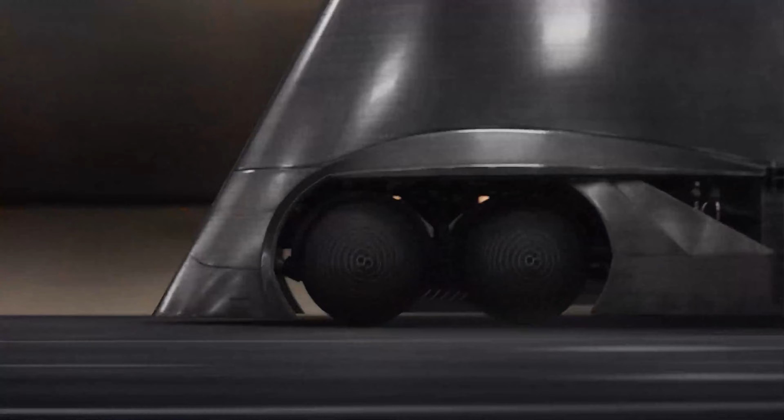Now switch from autonomous vehicle to manual override.

This comes from a video called I, Robot from 2004. I was a young child when I first was shocked by how a vehicle in this movie works.

We can see that there are two kinds of autonomous vehicles in the video. One has human passengers and another is absolutely unmanned.

In this research, we will discuss the first kind, with human passengers. We can see that it can drive itself, and in case of emergencies, the human driver can take over full control from the system. This imaginary vehicle is a glimpse of the future.

So, first is the background of autonomous vehicles. Why do we choose autonomous vehicles? This is a very good question.

According to the numbers, 1.2 million people die in traffic accidents every year in the world, and this number is still rising. About 94% of traffic accidents are caused by human factors.

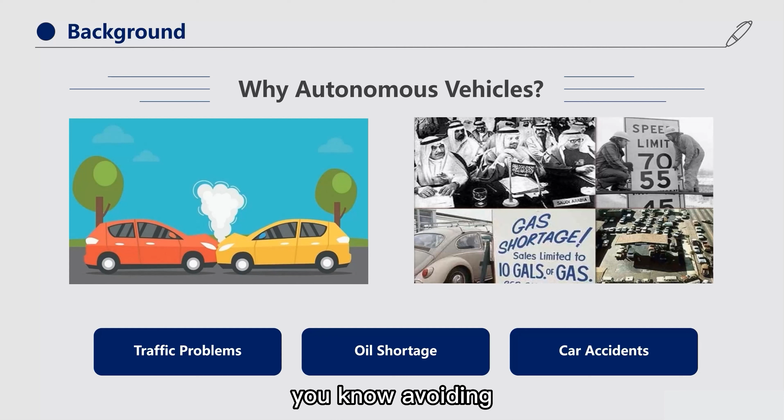It is estimated that if all the vehicles in the world are replaced with autonomous vehicles with intelligent perception and coordination capabilities, humankind can avoid at least 1 million deaths in traffic accidents every year, reduce auto carbon emissions by more than 10%, and save fossil fuel, avoiding a shortage of oil.

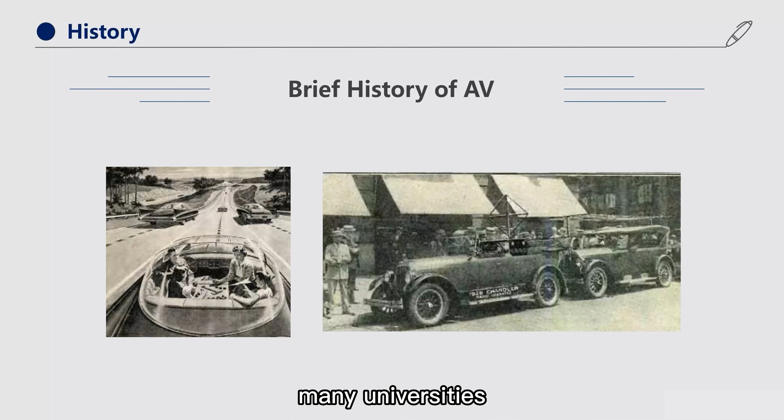Autonomous vehicle systems date back to the 1920s and 1930s, with the first truly autonomous vehicles appearing in the 1980s. Since the mid-1980s, many universities, research centers, and companies around the world have been researching and developing autonomous vehicles.

In 1984, Carnegie Mellon University promoted the NavLab program and the ALV program. After the 21st century, fully autonomous vehicles have been manufactured as test vehicles, and Tesla cars were the best and the first to launch.

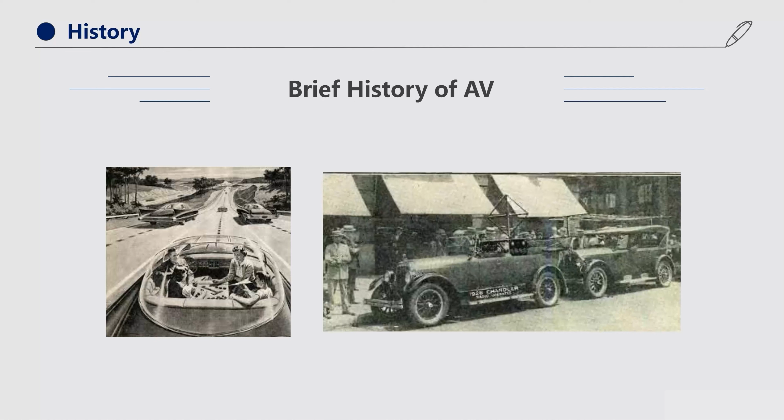Autonomous vehicles are used in specific environments. From now on, we will carry out need analysis on autonomous vehicles using system engineering knowledge.

From the perspective of engineering, using operations analysis, we can find a list of operational objectives and system capabilities, which includes several major needs of the current users for autonomous vehicles.

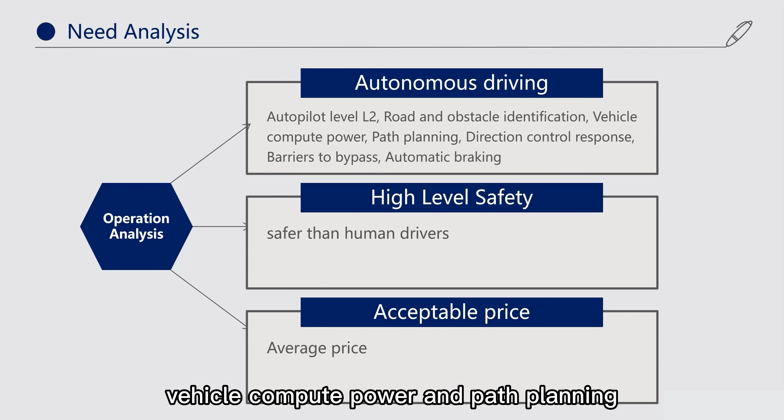The first is, of course, autonomous driving, and it includes several parts, but we unite them as one function, one subsystem, which includes autopilot level L2, road and obstacle identification, vehicle compute power, path planning, direction control response, barriers bypass, and automatic braking—that's emergency braking.

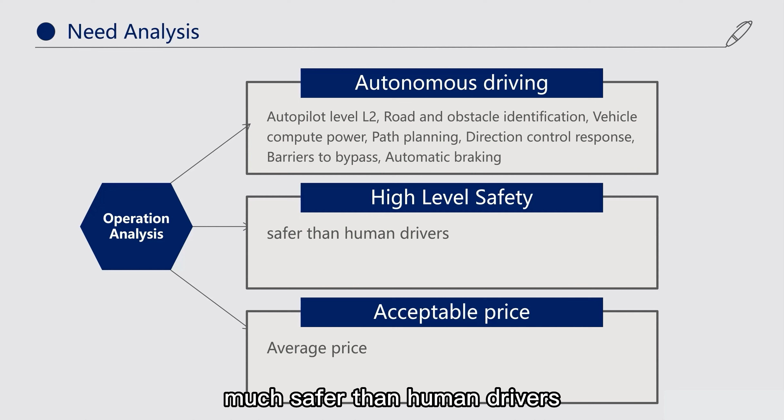The second one is a high level of safety, which means the autonomous vehicle must be much safer than human drivers. We as humans are not fit to focus the whole time, you know. The third one is acceptable price, which means it cannot be much more expensive than the average car price—it has to be affordable to most people.

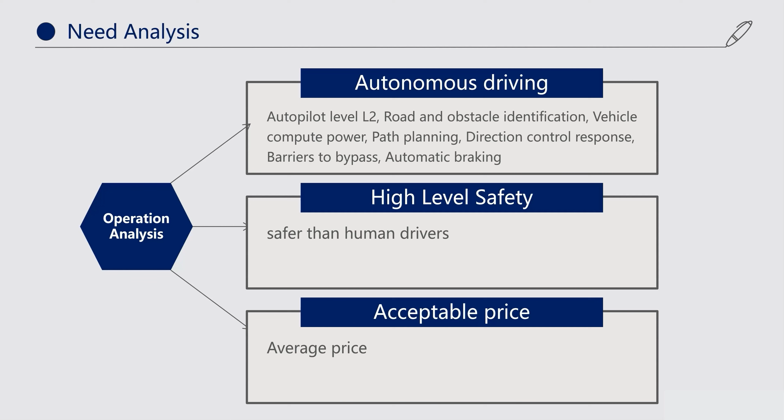Great. So in the functional analysis stage, we can find the following required functions.

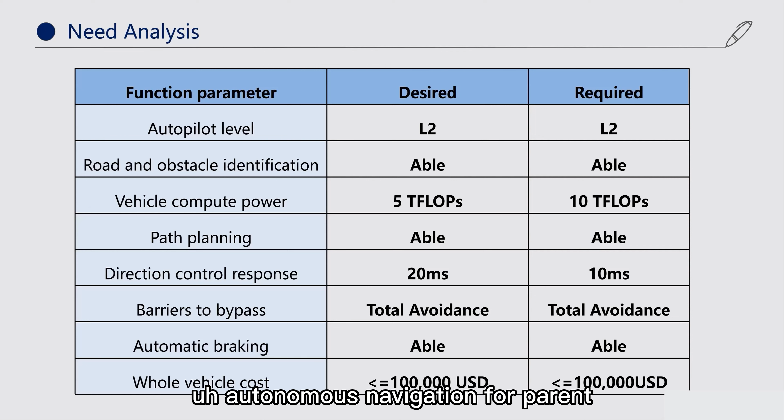Autonomous vehicles would be a vehicle that looks like a traditional car, but only looks like. The main function is to provide a certain degree, L2 or L3 level, of autonomous navigation for passengers or drivers, improve the identification of roads and obstacles, path planning, and direction control.

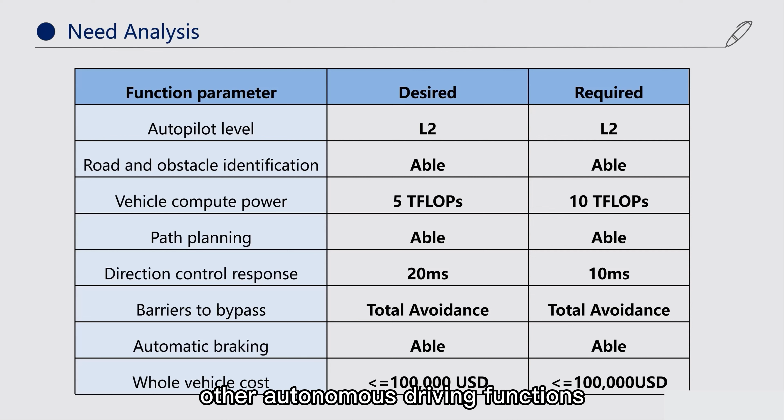It should include autonomic acceleration and deceleration in the range of 0 to 200 kilometers an hour, obstacle passing, emergency braking, and other autonomous driving functions. It must be able to provide passengers or drivers with driving services similar to human drivers.

Autonomous vehicles should be able to use onboard computers to determine in real-time factors that may pose risks to passengers, pedestrians, and others, and take reasonable measures to avoid obstacles in advance. Autonomous vehicles should have a similar price range to passenger cars, usually between $10,000 and $100,000.

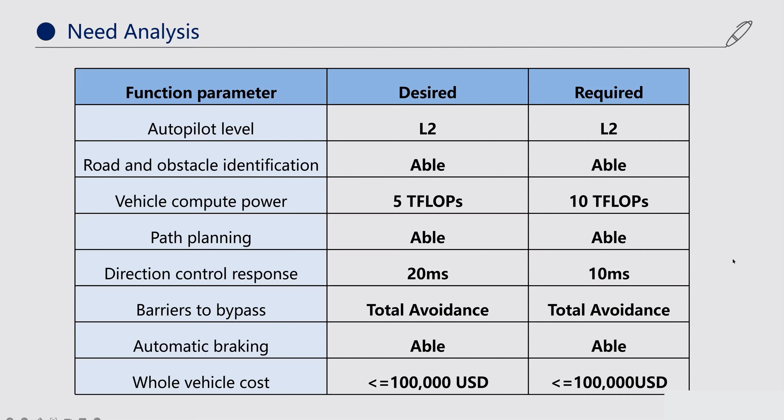According to the function needed, and as we analyzed, we know there are three kinds of needs that must be met: first is autonomous driving, second high-level safety, and third acceptable price, as we mentioned before.

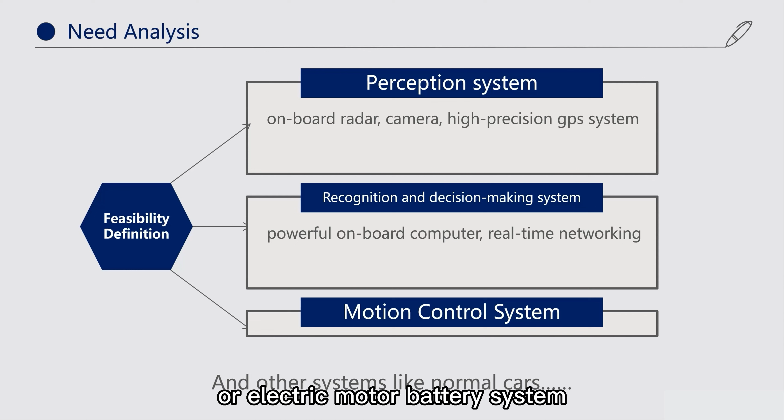Therefore, using the feasibility definition, we can conclude that the main components of an autonomous car include the engine or electric motor, battery system and electrical system, frame, suspension system, passenger compartment, interior, etc. Most of these are the same or similar to ordinary cars, so we won't discuss them in detail. What we are going to discuss is the subsystems that only the autonomous vehicle has, and those are vital to autonomous vehicles.

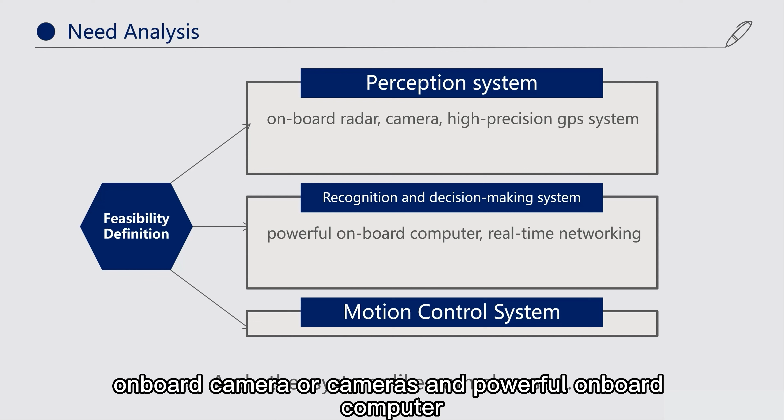These include onboard radar, onboard camera or cameras, a powerful onboard computer, high precision GPS system, real-time networking system, and direction, acceleration and deceleration control systems, etc.

These can be summarized into three major parts. The first is the environment perception system, or perception system. The second is the recognition and decision-making system - sometimes this is divided into two, but since those are all software on the onboard computer, algorithms, we combine them into one. The third is, of course, the motion control system, which does what the computer tells the car to do and transfers that into real actions.

And of course, there are other systems like normal cars, which we will not discuss in detail in this presentation.

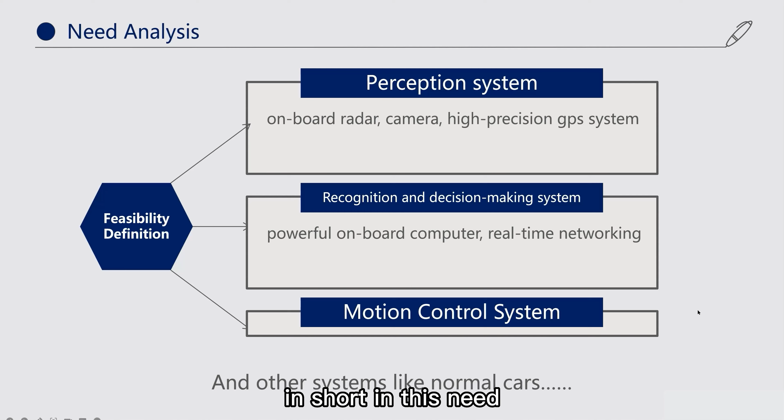In short, in this need validation stage, we analyzed and concluded that the needs are valid and can be met. We should be able to engineer an autonomous vehicle that meets our numbers.

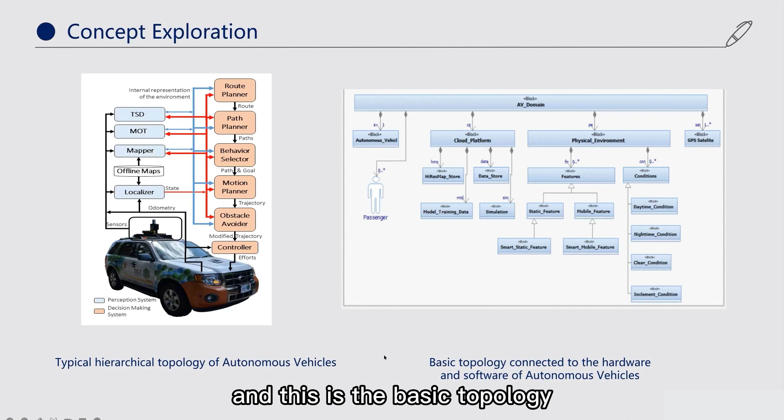This is a typical hierarchical topology of autonomous vehicles. This is the basic topology connecting the hardware and software of autonomous vehicles in the form of a diagram.

Now, in the concept exploration stage, considering the requirements and constraints and system materialization during the system lifecycle, we aim to find the suitable engineering alternatives for the system. Different subsystems of the autonomous driving system have multiple sets of available solutions, like every engineering practice.

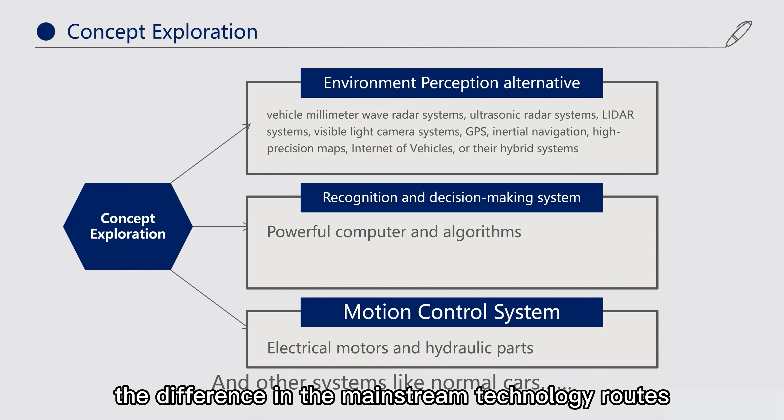The difference in mainstream technology routes mainly reflects the differences between the environment perception system and the vehicle intelligent identification, path planning, and vehicle control system algorithms, which includes three parts, as we mentioned before.

The first is alternatives for the environment perception system. These are vehicle millimeter wave radar systems and ultrasonic radar systems, LiDAR systems, visible light camera systems, and high precision GPS, inertial navigation, high precision maps, and of course, in order to communicate, we need the Internet of Vehicles or hybrid systems.

The second part is the recognition and decision-making system. Its alternatives are powerful computers, onboard computers, and algorithms. In short, for details you can check my written report.

The third part is the motion control system. Electrical motors and hydraulic parts are usually the alternatives we would adopt. Just to be clear, autonomous vehicles are still vehicles - they still have the main parts and traditional subsystems that normal vehicles have. These traditional subsystems will be included in the final report of the engineering exploration.

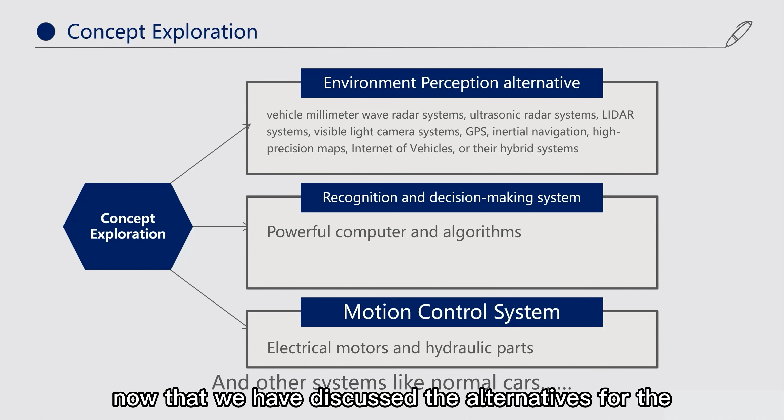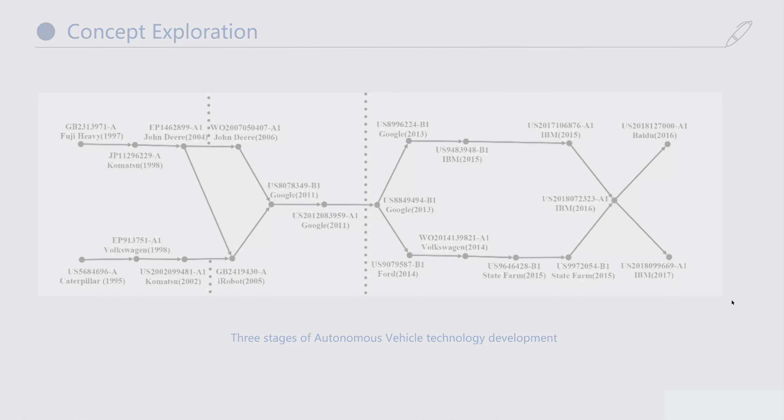Now we have got to the concept definition part. In this part, we will choose the finest alternative and give the definition of them. For detailed discussion, see the written report. Due to time restrictions, we won't go through the discussion in detail - I can see I have only 1 minute left. Oh well, maybe I need more.

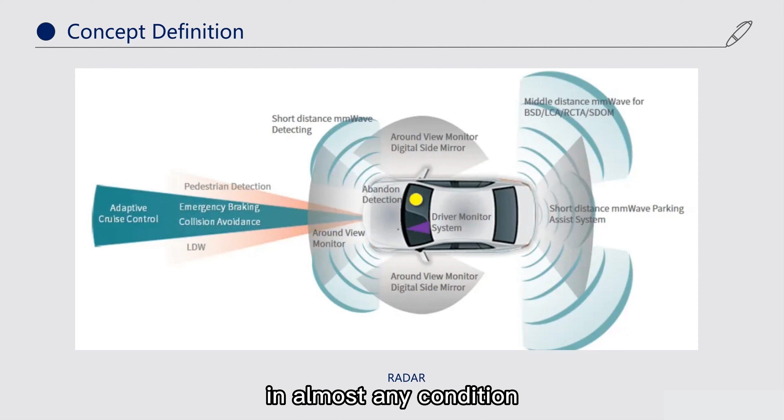We choose radar with cameras over LiDAR to be the environment perception solution, because radar is the most reliable technology for detecting the distance, range, and motion characteristics of objects in almost any condition. It uses reflected radio waves to detect obstacles behind other obstacles and requires less signal processing.

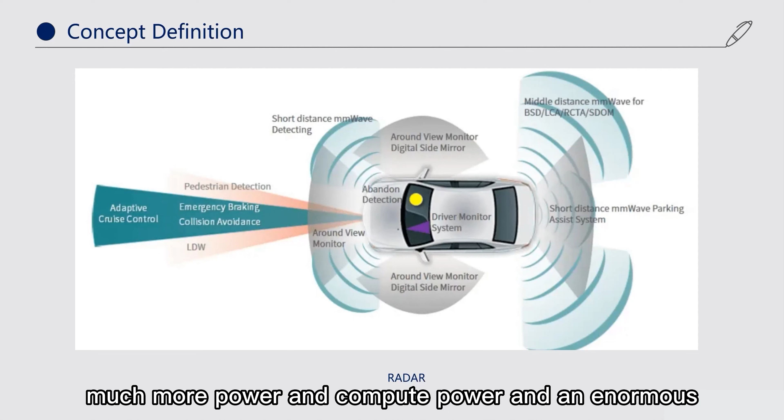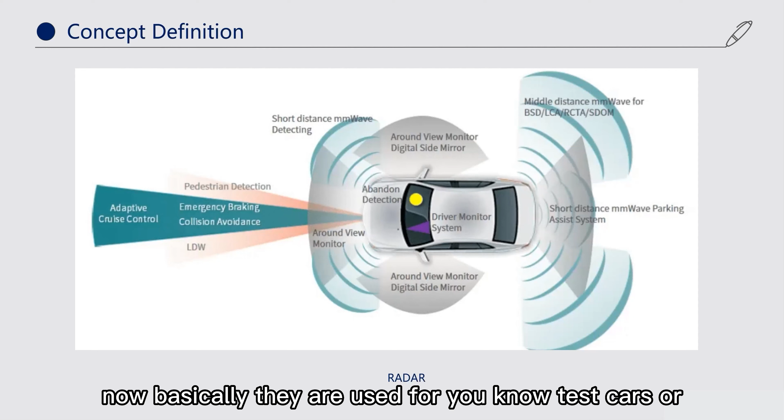As for LiDAR, it's a new technology, but LiDAR systems require much more power and compute power and an enormous amount of storage. So LiDARs are basically now used for test cars or luxury cars.

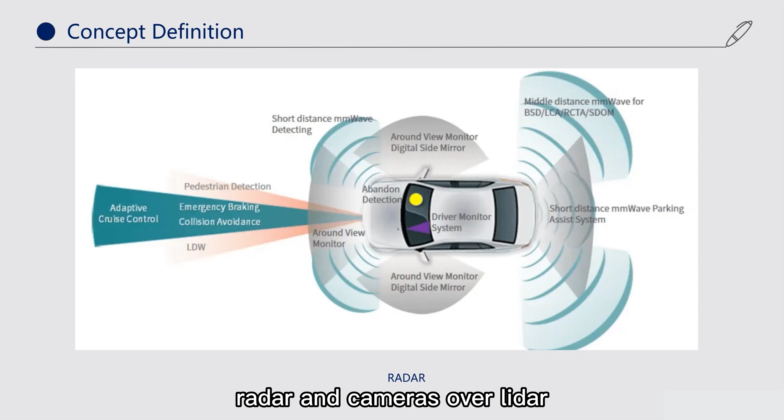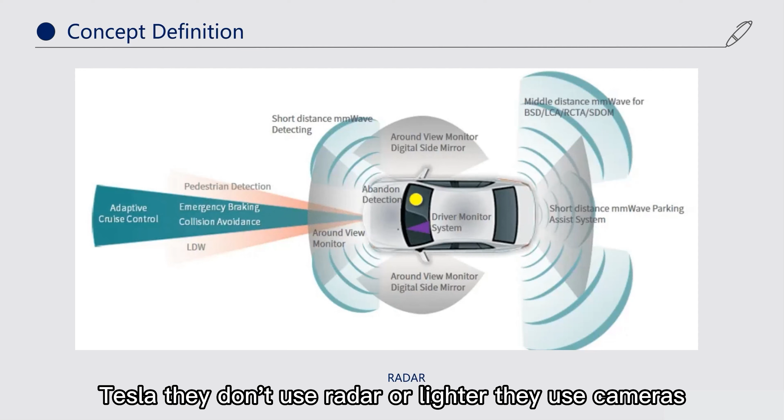For ordinary civilian vehicles, we should choose radar and cameras over LiDAR. Sometimes, in order to save money and lower costs, some companies choose camera systems with 6 to 8 cameras around the car, like Tesla. Tesla doesn't use radar or LiDAR - they use cameras only.

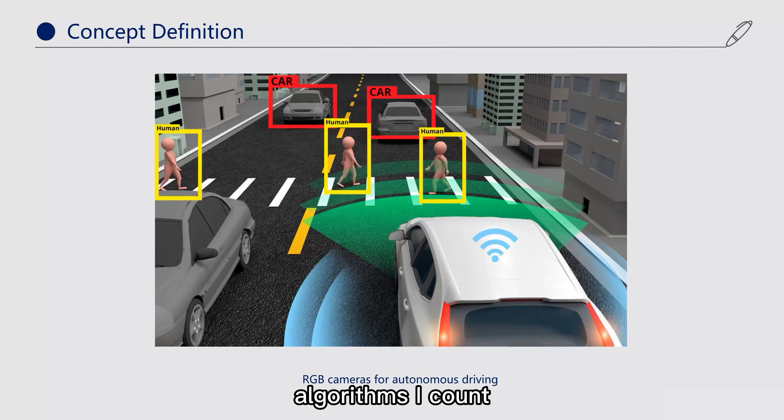Now, the second part is route planning and motion control algorithms. I cannot visualize algorithms, so I use these pictures - you can have a better idea of it.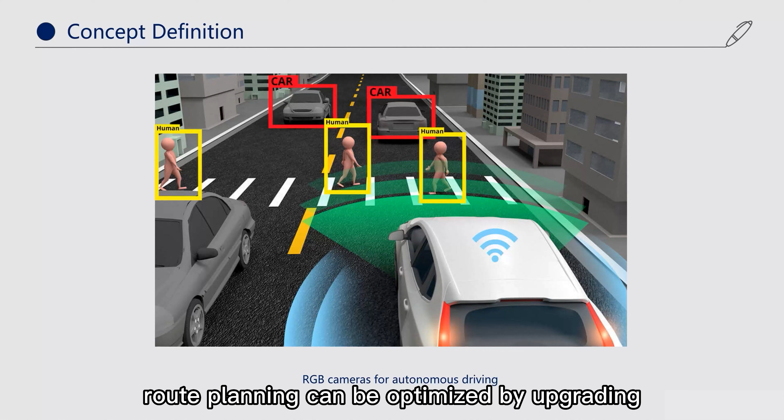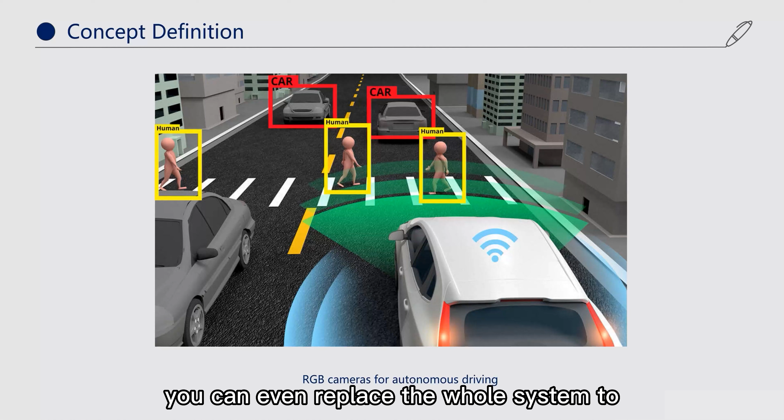Route planning is the real-time calculation of data returned by the sensors, radar and cameras, by the onboard computer. The computer processes it, and the overall route and short distance route are planned according to the destination or preferences. Route planning can be optimized by upgrading after the vehicle is put into use, meaning you can even replace the algorithms or the whole system with a better one.

We can get a better system, a better perception, and a better algorithm after using the car for a few years. Motion control involves the fine control of moving parts of the vehicle control system, which is generally completed by high precision motors or hydraulic moving parts.

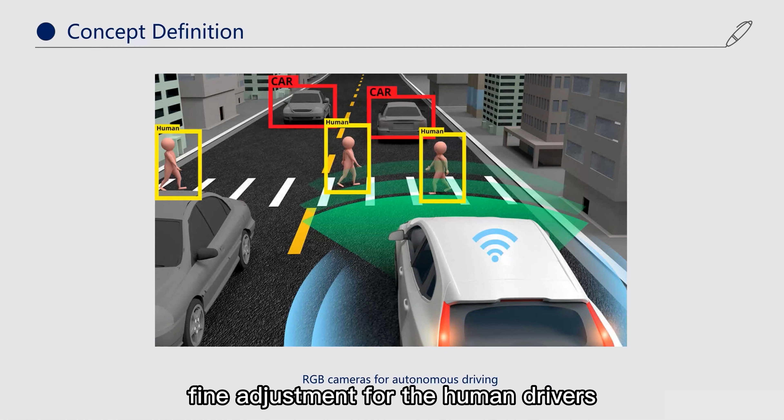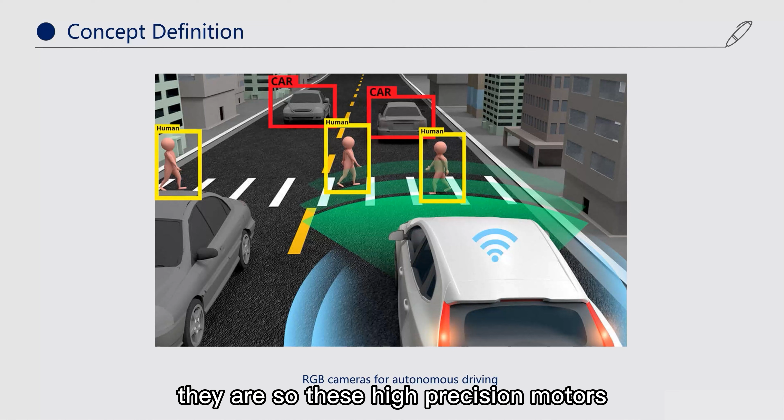These are basically the same as traditional cars, because traditional cars have a motion adjustment system. It's automatic and can do tiny fine adjustments for human drivers, sometimes to keep the car in a straight line on the highway. These high precision motors and hydraulic moving parts are the same as traditional car parts, and they execute real-time commands from the onboard computer.

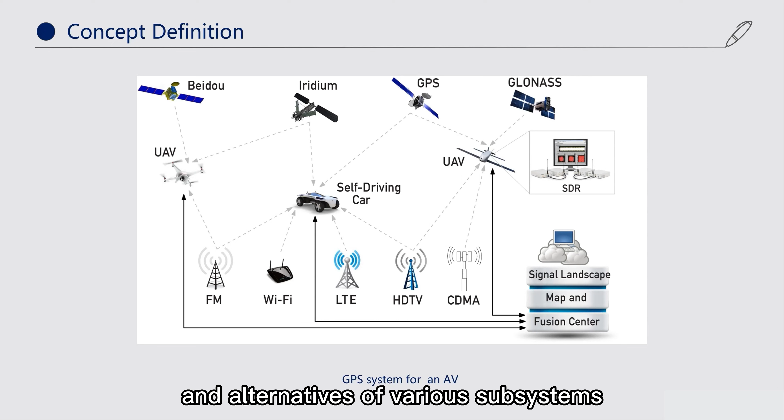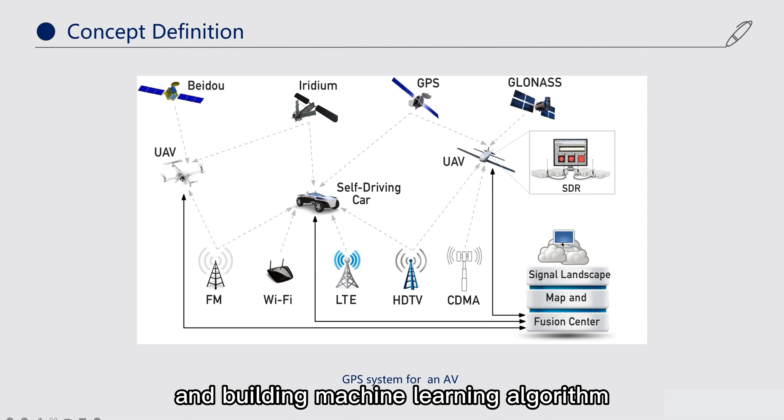After discussing the technical development route of autonomous vehicles, alternatives of various subsystems, and investigation of autonomous vehicles in the market, our preliminary selected technical solutions are vehicle cameras and radar as the environment perception system, and building machine learning algorithms in the vehicle computer, which is very powerful, as identification and path planning algorithms.

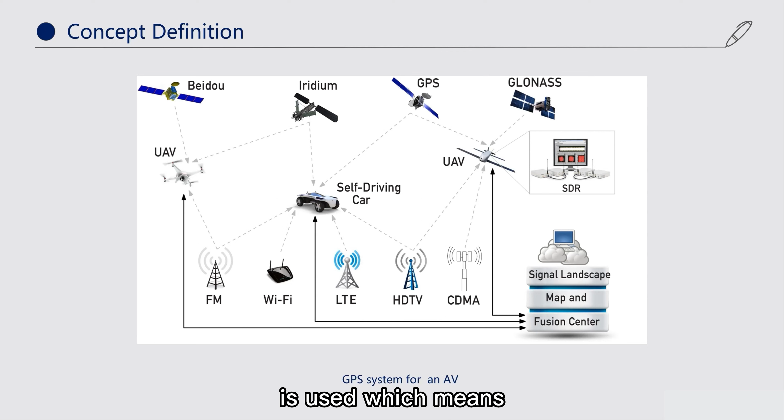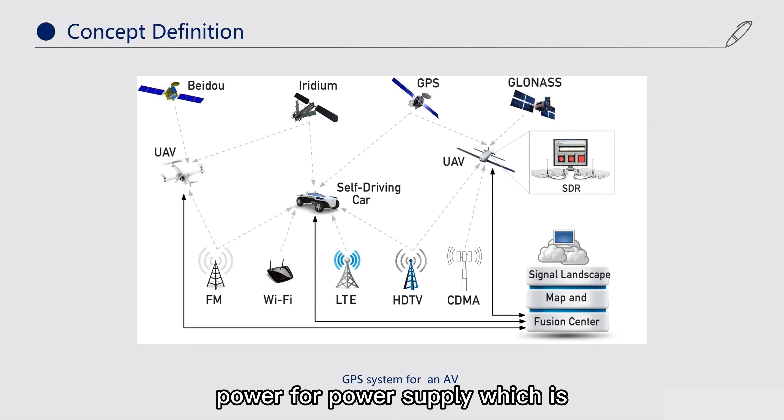The infrastructure of a conventional lithium battery electric vehicle is used, meaning the autonomous driving vehicles are mostly vehicles with batteries. They need a powerful power supply, which is better installed in electric cars.

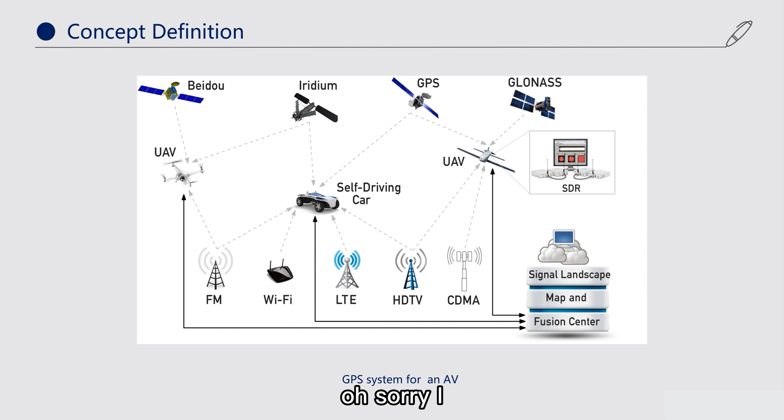Oh, sorry, I discovered that I forgot to flip the PowerPoint.

So now this is the visualization picture of the machine learning driving pattern, for the algorithms, and this is the topology that we choose: an autonomous vehicle with radar, LiDAR, and camera.

No, we don't want LiDAR. We want radar, cameras, front cameras, and cameras around the car, and GPS, and of course an AI driving system.

As for the assessment, at this stage, this technical concept has been demonstrated by some major auto manufacturers. Tesla uses pure visible light cameras as the environment perception system, while Toyota, Honda, Lexus, and other manufacturers use a mixture of radar or LiDAR and cameras.

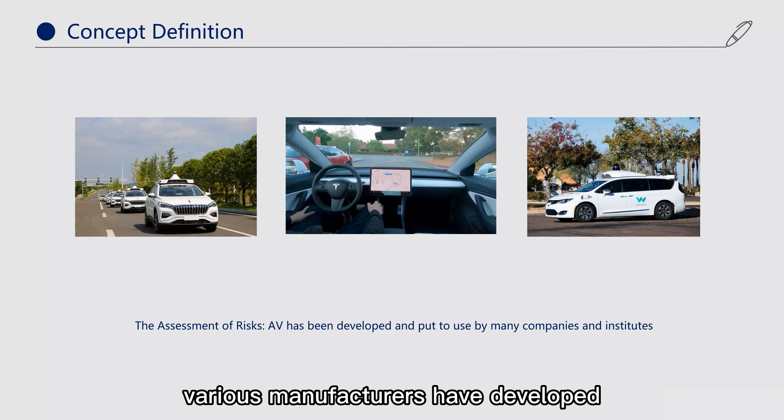Various manufacturers have developed core algorithms for autonomous driving based on machine learning. Almost all of them are based on machine learning, so we can conclude that the technical risk of this engineering concept is relatively small. The commercial risk depends on the technical strength and production and sales capabilities of the participating companies.

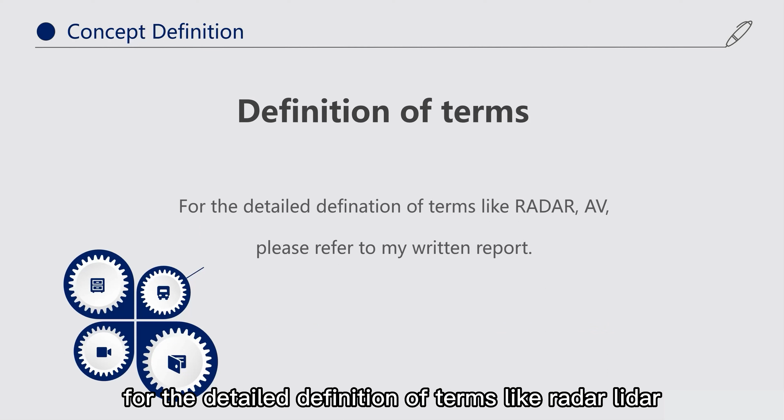For the detailed definition of terms like radar, LiDAR, and AV, please refer to my written report.

The next is the engineering development stage. It includes advanced development, engineering design, integration and evaluation. First, in the advanced development stage, we need to analyze and solve as many uncertain factors as possible, so as to output stable design specifications and models. Therefore, we need to consider many factors and analyze the uncertainties.

First is high technical requirements, including route perception technology, automatic control technology, and human-computer interaction technology. Second, there are huge design challenges: autonomous vehicles need to work in a variety of road environments and conditions, including handling all kinds of weather conditions and complex traffic situations.

Third is safety, of course. Autonomous vehicles must be safe in all situations, so software and hardware safety, system reliability, and personal safety should be considered.

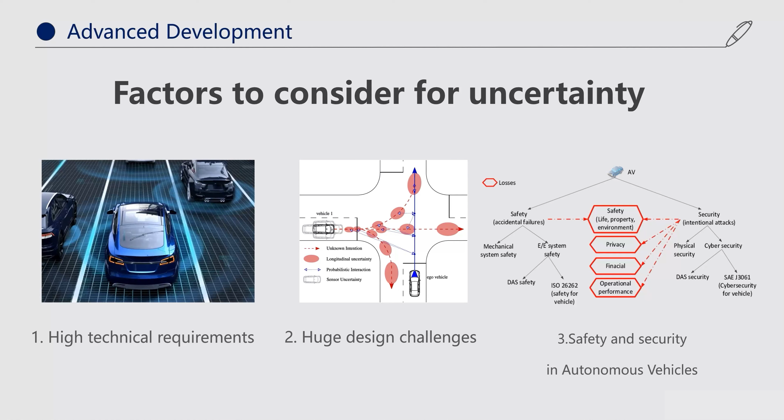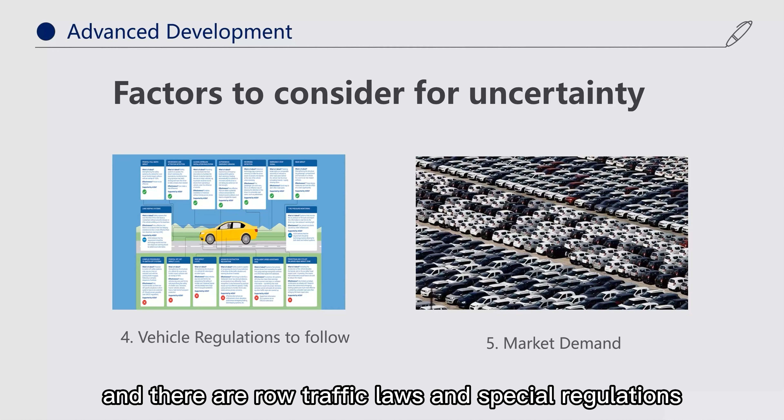Fourth is law and regulations: a variety of vehicle safety laws and regulations, road traffic laws, and special regulations for autonomous vehicles only. The last uncertainty is market demand.

Using the method of requirements analysis, function analysis, design, and system engineering, we need to study and analyze the uncertain places in the system. Based on our analysis in the previous stage, we have selected the following technical solution: onboard camera and radar as the environment perception system, and a machine learning algorithm built into the onboard computer as the identification and path planning algorithm. The basic architecture is that of traditional lithium battery electric vehicles.

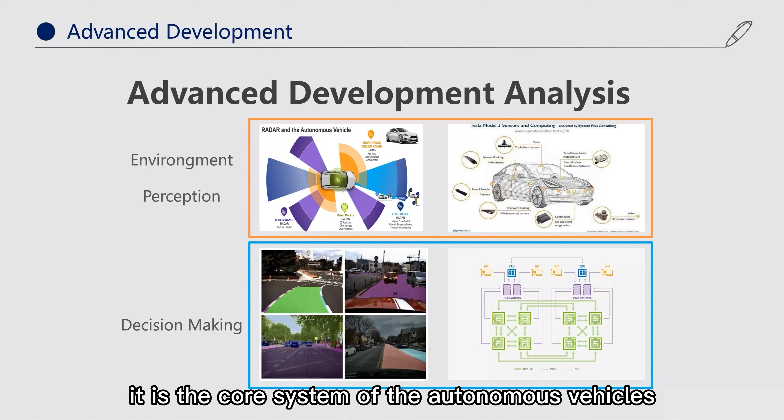Since the main subsystems of the autonomous vehicle have been transformed to some extent, we need to carry out advanced development of these systems. The first is the environment perception system. It is the core system of the autonomous vehicle and a very important system, responsible for collecting and analyzing surrounding environment information and converting it into data that can be understood by the machine. Therefore, special attention should be paid to the performance and reliability of the environment perception system during testing to ensure that the vehicle can correctly perceive the surrounding environment.

There are two kinds: the first is radar and the second is a visual camera system. They are both very cheap, mature, and widely used. For more detailed information, please refer to my thesis in the following parts.

The second is the decision-making system, which is this one. It is the intelligence center of the autonomous vehicle. The maturity and stability of the decision-making system depend on the robustness and performance of the onboard computer, mostly the chips, the CPU and GPU. At present, the onboard computers of self-driving vehicles are generally equipped with powerful chips, which are proven to be stable, powerful, and mature.

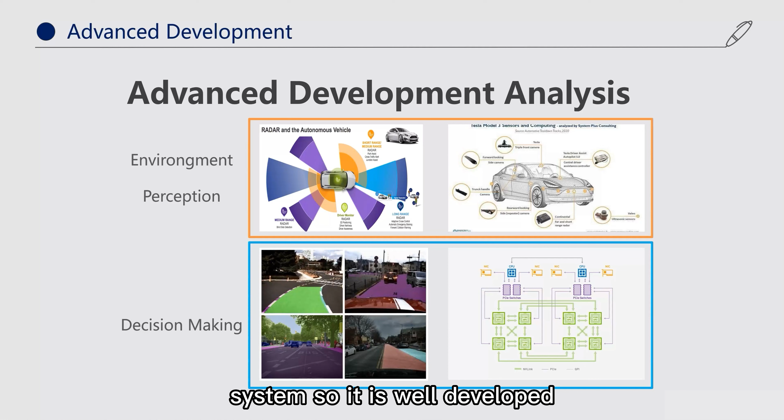The third one is the control system. The control system is the execution center of the autonomous vehicle, which is responsible for controlling the vehicle's power system, steering system, and braking system according to the instructions of the decision-making system. It is well developed, having been developing for decades, and is mature and durable.

Now, through the analysis of system engineering methods by advanced engineering, we can determine that the system design specifications of autonomous vehicles should be as follows. The first is system overview: it refers to a vehicle that is similar in appearance and function to an ordinary family car, but...

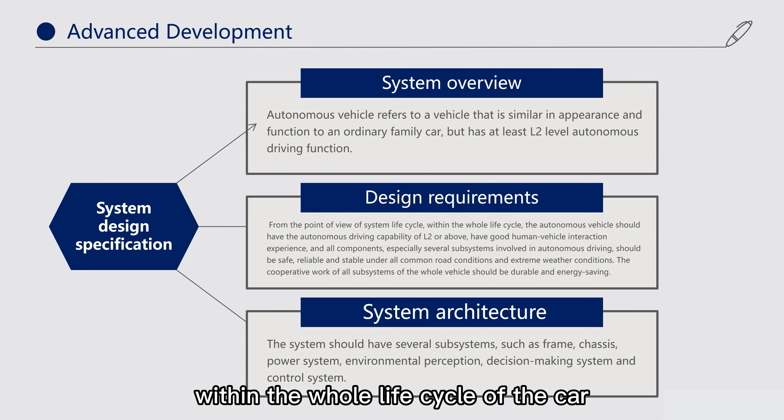has at least L2 level autonomous driving function. The second is design requirements. From the point of view of system lifecycle, within the whole lifecycle of the car, it should have the autonomous driving capability of L2 or above.

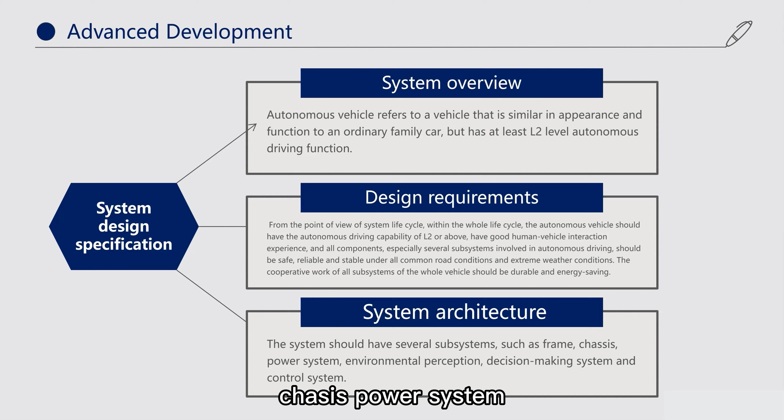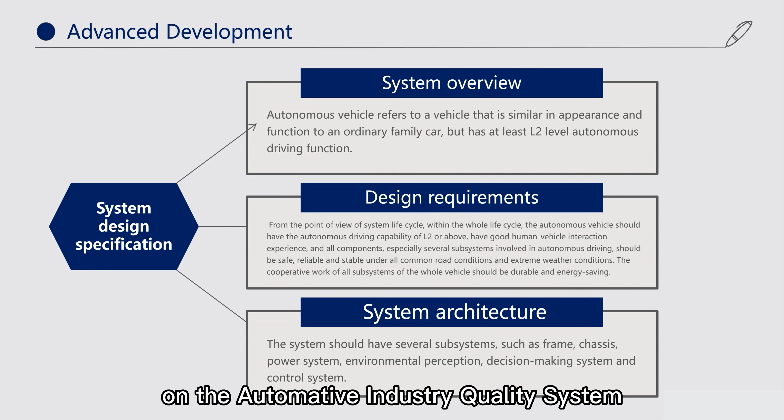The third one is system architecture. The system should have several subsystems, such as frame, chassis, power system, environment perception, decision-making system, and control system. The fourth is system reliability, in line with the International Standards Organization's Automotive Industry Quality System Standard, ISO TS.

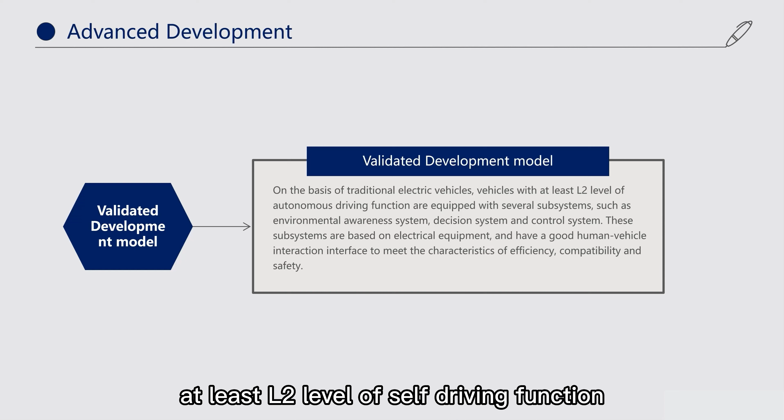And now we have the validated model. Through the system engineering method and analysis of advanced engineering, we can determine the model of the autonomous vehicle system design, which is based on the basic model of traditional electric vehicles with at least L2 level of self-driving function.

It should be equipped with an environmental awareness system, decision-making system, and control system. These systems are based on the...

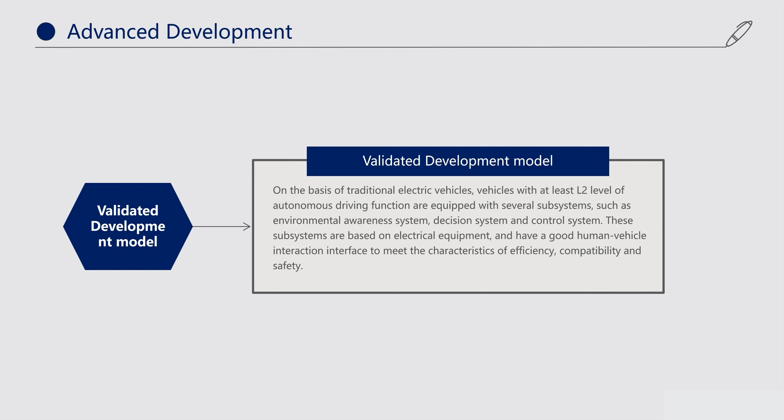Next is the engineering design stage. For engineering purposes, we should pay attention to reliability, maintainability, and producibility. The produced system, which is the autonomous vehicle, must have an accepted long mean time between failure, which is MTBF.

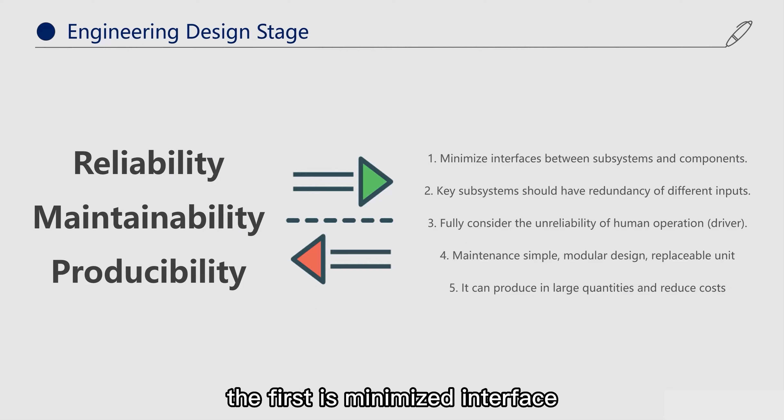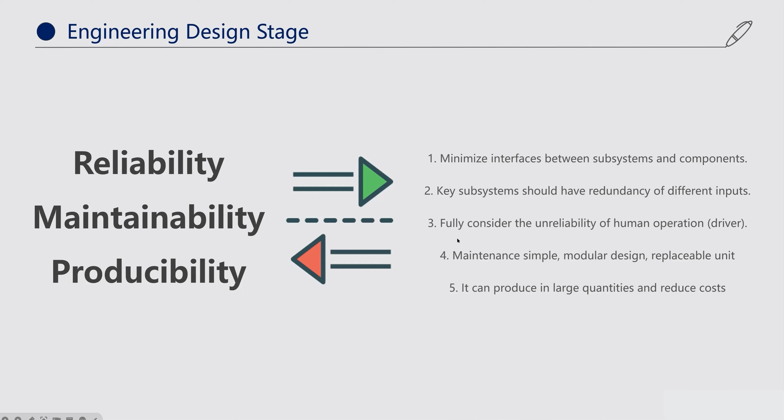Therefore, I think the engineering design of autonomous vehicles should strive to achieve a few characteristics. The first is to minimize interfaces between subsystems and components. The second is that key subsystems should have redundancy of different inputs. The third is to fully consider the unreliability of human operation. The fourth is maintenance: simple, modular design, and replaceable units. The fifth is that it can be produced in large quantities with reduced cost.

According to the requirements of reliability, maintainability, and producibility, we conducted the following analysis. First, key subsystems should have redundancy of different inputs. Multiple redundancy mechanisms can be designed for key subsystems, including software redundancy, hardware redundancy, and information redundancy, all for ensuring system reliability.

The second is to consider the unreliability of human operation. We should design proper transfer mechanisms. Autonomous vehicles should have proper transfer mechanisms that allow the driver to easily take over control of the system if necessary.

The third is to maintain a simple modular design and replaceable units. By using modular design, the system can be divided into several independent modules, making maintenance easier, and using standard interfaces can make the connections between modules easier and improve the maintainability of the system.

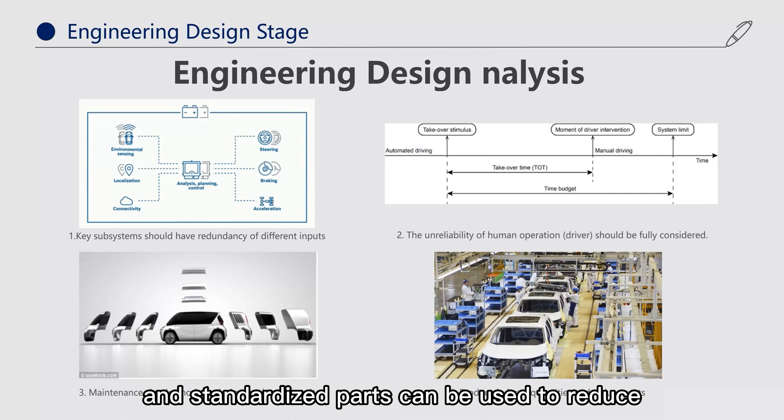Through the previous analysis, we know there are specific requirements of this stage of engineering design, so we can infer which specific parts and subsystems may have instability and risk based on these requirements. We can propose the following test requirements to provide reference for the next stage of testing.

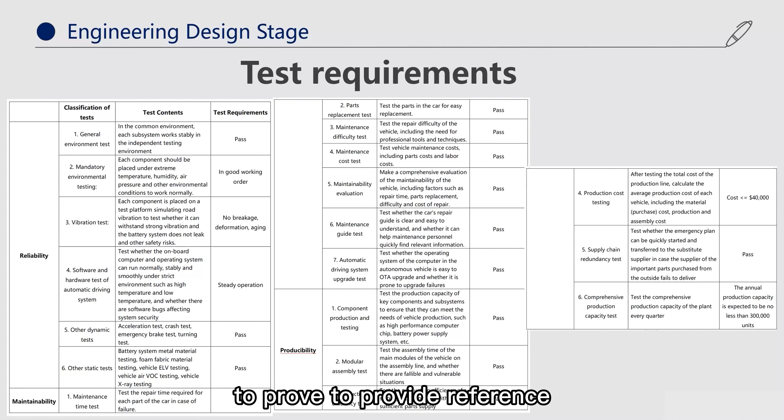You can see that I've divided them into three aspects: reliability, maintainability, and producibility. They have very detailed, small requirements. I like them very much.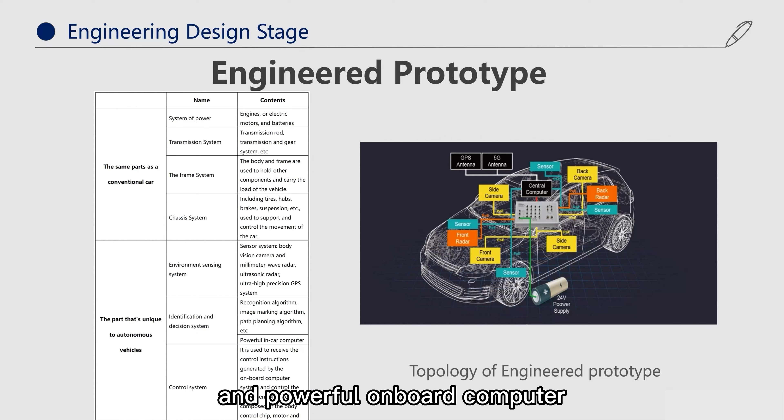Now, the main components of an autonomous vehicle include the engine, battery system, electrical system, frame, suspension system, passenger compartments, interior, etc., as well as onboard radar, camera, powerful onboard computer, high-precision GPS system, real-time networking system, which are not available in ordinary cars. These can be summarized into 4 subsystems.

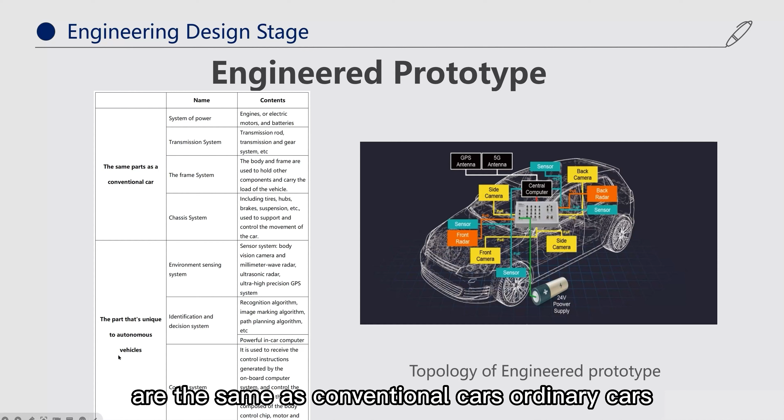In more detail, the prototype of this autonomous vehicle studied should consist of the following parts. We can see that the prototype has parts that are the same as conventional, ordinary cars, and parts that are unique to autonomous vehicles. This is a very detailed chart.

This is the topology of the engineered prototype. The next is integration and evaluation. Now we are putting the parts together and testing them.

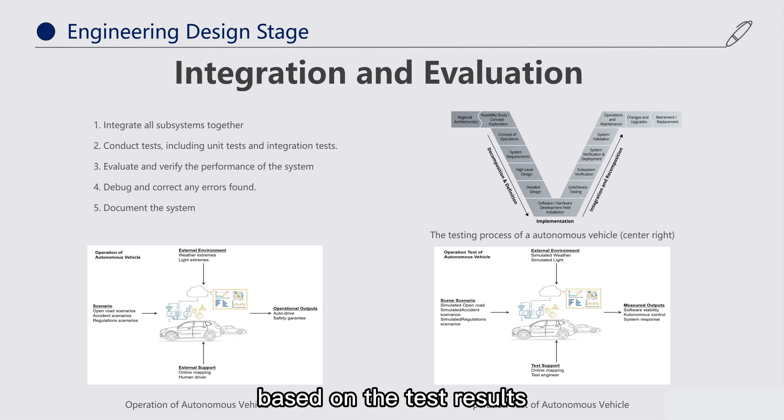During the evaluation phase, the entire system is tested to evaluate performance indicators such as functionality, reliability, maintainability, and so on. These tests can be mock or real tests. Based on the test results, system engineers can make adjustments to improve system performance and reliability.

It includes integrating all subsystems together, conducting tests, evaluating and verifying the performance, then debugging and documenting this test process.

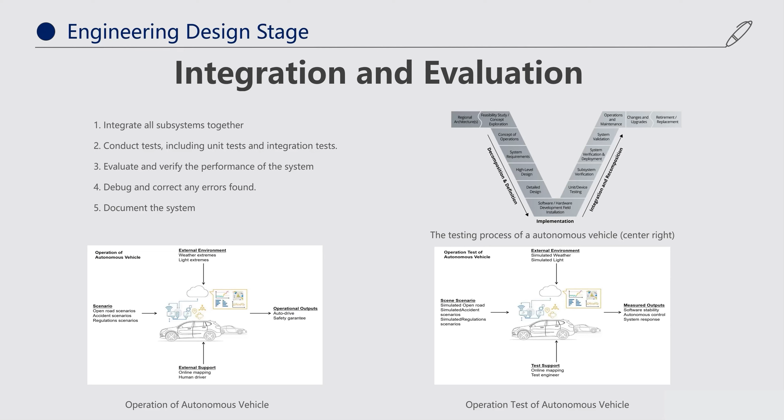After analysis, we come to these detailed test requirements, including simulated tests and field tests. This is the simulated test.

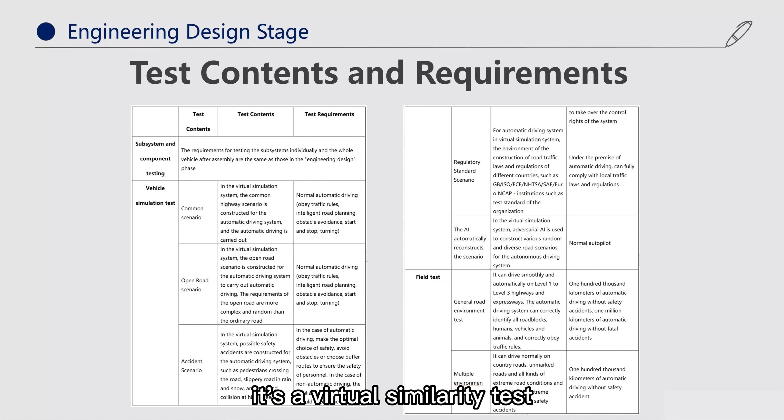Field test is that you run it on the road. Simulated test is that you run it on a computer system—it's a virtual simulated test, or you can run it on the testing field.

Before that, we should test the subsystems and components, just like we did in the last parts.

Now, when it comes to testing, there is a very important thing called scenario. Scenario is the most important step in the automatic driving testing system. So we should try our best to ensure that the automatic driving test scenario is practical and realistic, and let the test system accept tests of various and many kinds of scenarios.

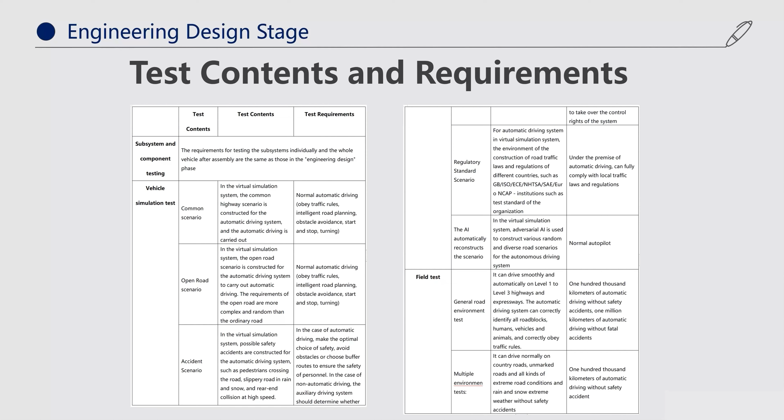From the perspective of scenario structure, there are different driving occasions, such as highway, rural roads, urban conditions, airports, docks, closed parks, and open roads, and so on. So in each case, how to drive—the driving task, driving speed, driving mode, and so on—constitute the three-dimensional architecture of the whole scenario.

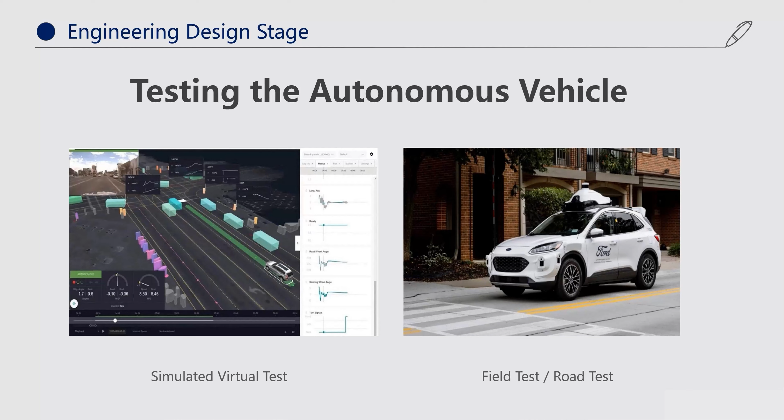The next is the post-development stage, which means we have finished designing and building prototypes. Now we want to produce them, operate and support them, which means selling them. So this stage includes production, operation, and support.

Now we have a perfect car as a prototype, so how can we put it into production? As a system engineer, it is not a smooth ride.

We all know that, from development to production, especially when it's something complicated like a car, the production of a prototype machine and the production on a factory assembly line are two very different systems.

Although we have tried our best to consider the convenience and efficiency of production in the design stage, we still need to carefully follow up and plan the transition process, and the production and delivery of the onboard computer chips.

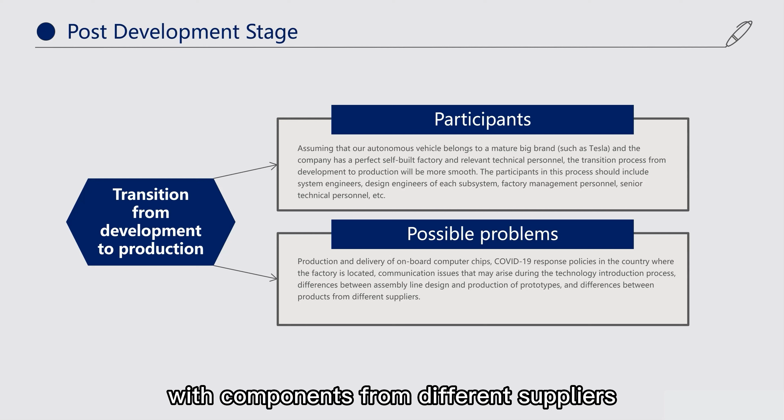Communication issues that may arise during the technology introduction process, and differences between assembly line design and production of prototypes, and differences between products with components from different suppliers. These are all very severe problems that we have to face during the transition to production.

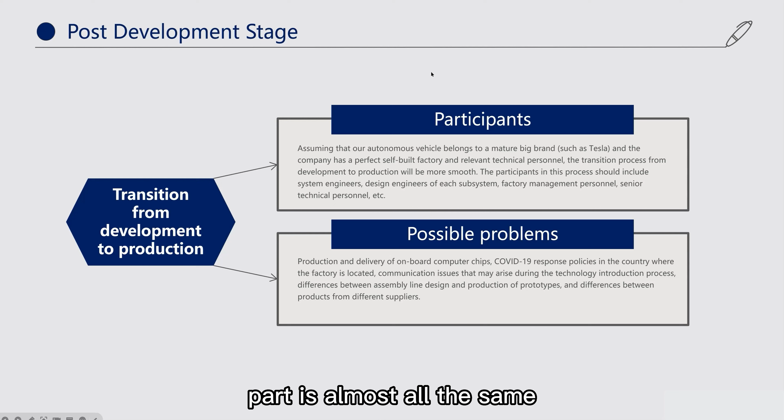So I've mentioned the participants of the transition. This part is almost the same as with any other kind of product—you know, the system engineer, the senior technical personnel of the factory, etc.

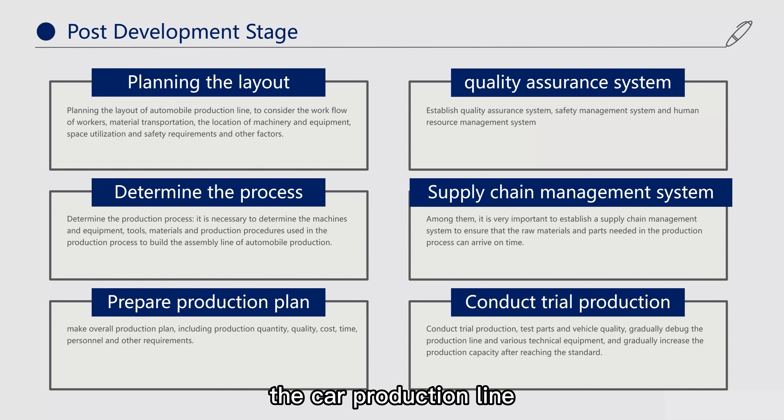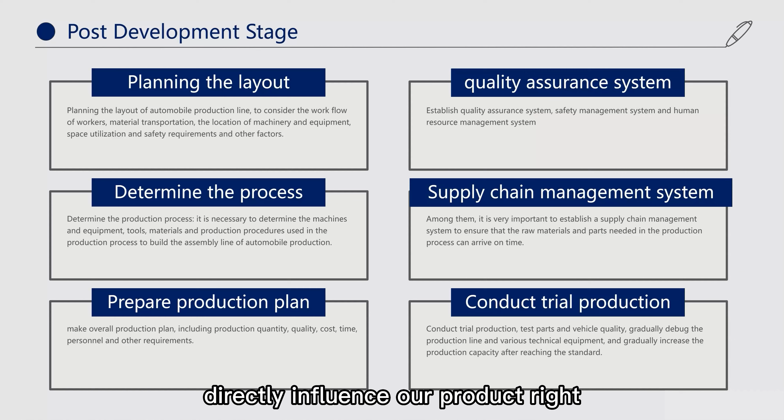Now, conduct trial production. We can see that this is a streamline, this is a production line. After the trial production, we test the parts and vehicle quality, and gradually debug the production line and various technical equipment, increasing the production capacity after reaching the standard.

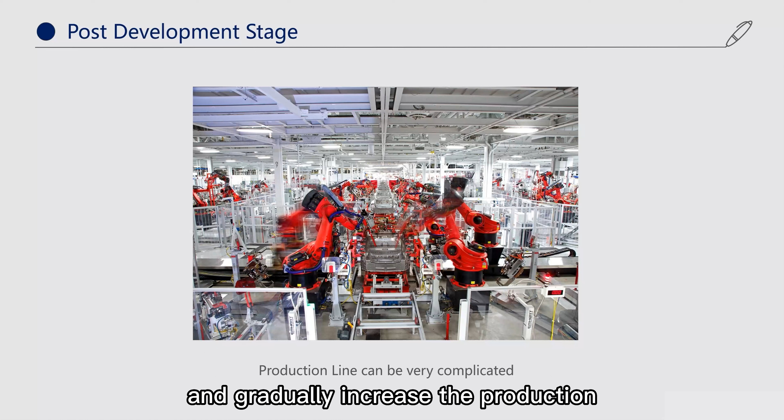As a manufacturer, after production, operation and support are very important too. First, provide detailed car instructions. Establish a fan community, write a very good user manual, and create a good fan culture for users, which will give users and fans a place to talk about tips.

Second, we should build a perfect after-sales service network so that consumers can conveniently enjoy professional after-sales service. An after-sales record system and reasonable warranty policy systems and warranty networks should be established as well.

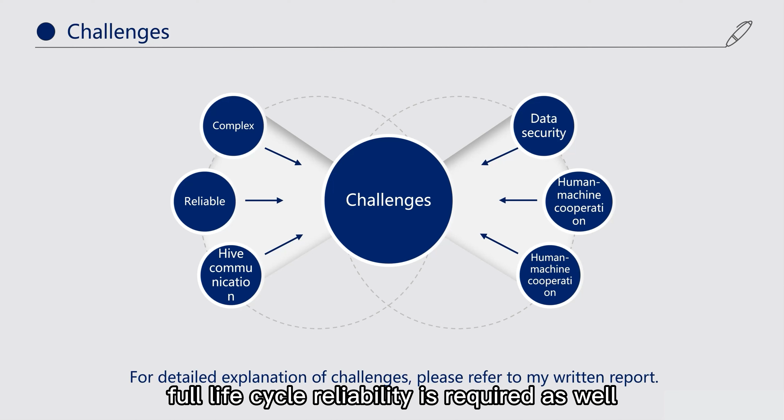There are some pretty huge challenges for system engineering during this whole process. There are problems like complex system architecture, high demand of robustness, and compatibility issues. Full life cycle reliability is required as well. Safety perception systems are not perfect, and there is a need for high precision maps, satellite navigation, and connectivity technology of internet of vehicles, data security—these are all very big problems.

And lastly, there is a human-machine cooperation need, so there are still some social acceptance problems and legal risks. For a more detailed explanation of challenges, please refer to my written report.

This project is a case study on autonomous vehicles. In short, it uses the analysis method of system engineering through the concept development stage, engineering development stage, and post-development stage. The system model of an autonomous vehicle is analyzed and constructed from scratch. This project contains examples of several car brands and types.

Like Tesla. So after a master's study and this case study project, I fell in love with this course of system engineering, which is very suitable for me to give full play to my characteristics of wide range of knowledge, strong overall perspective, and good organization and coordination ability.